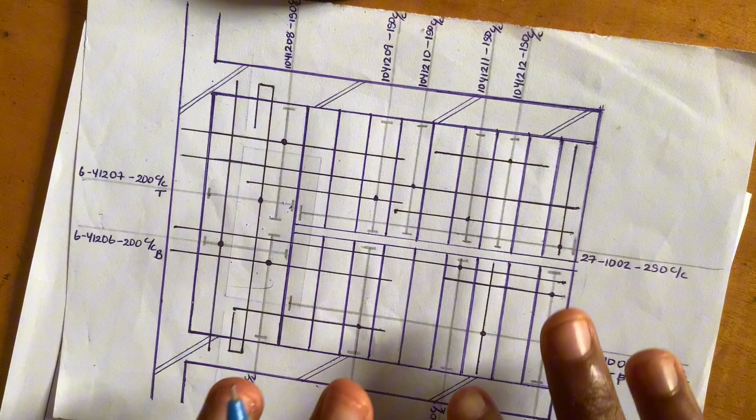In today's video we are going to be treating how to measure the reinforcements in our staircase. This is the reinforcement drawing we've been given. I know it looks absurd, but it is very easy to actually read reinforcement drawings, and I'm going to show you in this video how it is done.

This reinforcement drawing gives you an idea of the measurements of each reinforcement bar and how it is placed in the construction of the staircase. If you understand how the reinforcement bar is placed, you can easily, to some degree, calculate the total length of reinforcement needed to construct a particular staircase.

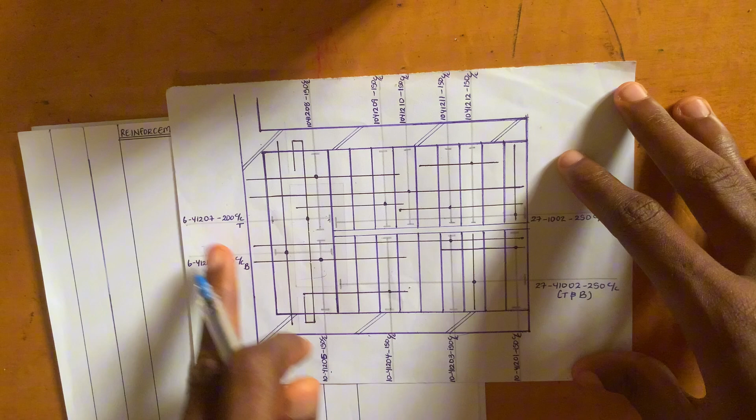So first things first, in order to read your reinforcement drawing, the first thing you should look at is what they call the call out. The call out is these markings, the details written at the side of the drawings. Most of the time you will always see a call out sidelined either vertically or horizontally on the drawing. Before we move forward, we need to understand how to read this call out, because if you don't understand it, you cannot move forward.

Let's take this call out as an example: 6 Y12 07 200 center to center, and T under, which means top. This tells us that in this drawing, when they were constructing the staircase, the reinforcements used were top reinforcements and bottom reinforcements.

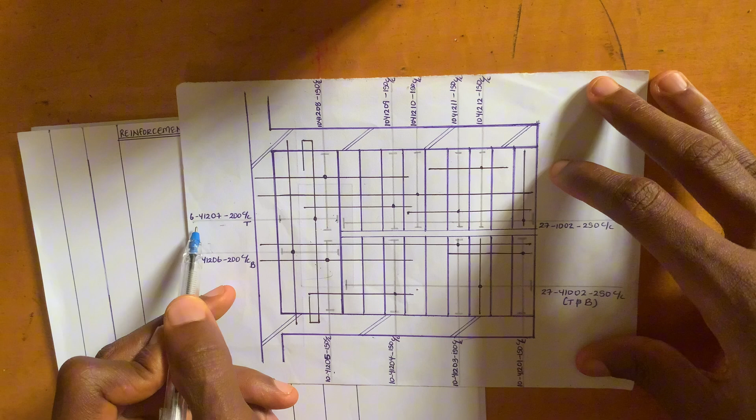So now, how do I read this call out? This 6 gives you the number of reinforcements. This Y12 gives you the thickness, or dimension, of the reinforcement, whether it is Y12, Y10, Y16, or Y20. If it was Y20, you would see it as Y20. If it was Y10, you would see it as Y10.

Then this 07 is called the bar mark. This bar mark is a way of arranging the reinforcements into numbers, so when you are making your bar bending schedule, it is easy for you - just like saying bar 1, bar 2, bar 3, bar 4, bar 5, bar 6, down to the last reinforcement you have. As you can see, this is bar 7, and underneath it is bar 6, and so on.

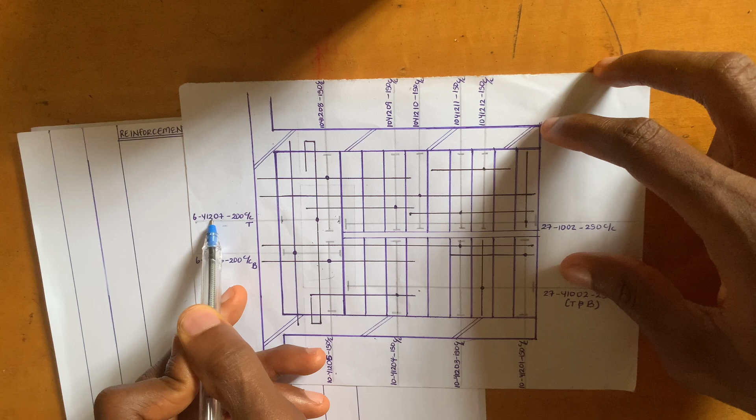So we said the first number is the number of that particular type of reinforcement. Y12 is the size of the reinforcement. 07 is the bar mark of the reinforcement. 200 C to C is the spacing at which these reinforcements will be placed. Then T under means it is the top reinforcement.

So now, since you understand the call out, how do we know which particular bar this call out is for? All you need to do is this: after the call out, you will see a line. If the call out is written vertically, the bar is placed horizontally. And if the call out is written horizontally, the bar is placed vertically.

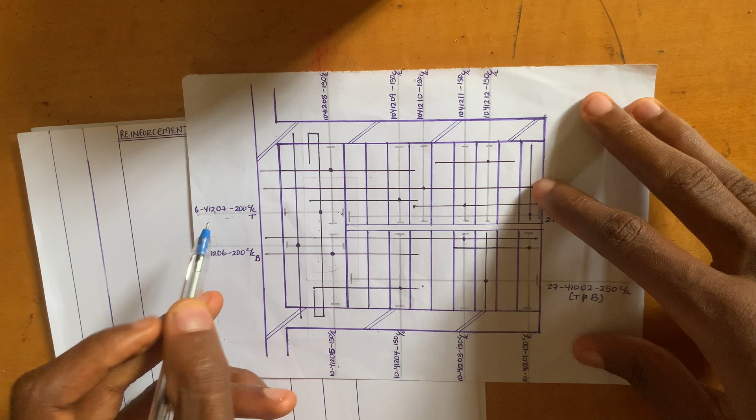This call out for bar mark 7 is written horizontally. So how do we now know where the bar is? Since you know it's written horizontally, there will be a horizontal line within this call out, as you can see drawn in pencil. All you need to do is trace this horizontal line down to where there is a dot on that particular line.

Let's go again - as you can see, we trace, and you can see the dot. So when you see the dot, you will see a perpendicular line along that dot. You trace that perpendicular line, and you can see there's a line like this. So this line that you are seeing is bar mark 7.

Let me go over it again: you trace the line for bar mark 7 to the dot, then trace the perpendicular line along that dot. So this is the dot, and you can see there's a line perpendicular to it, like this.

This line you are seeing here is the reinforcement. So we need to calculate for this length of reinforcement here.

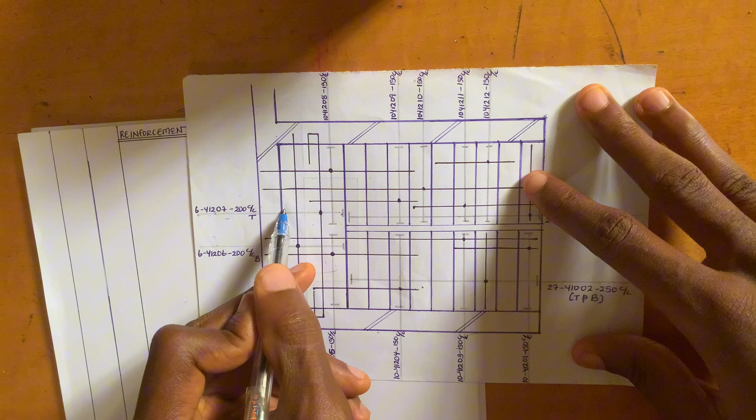After you've calculated the length of this reinforcement, how do we know how it will be placed? When tracing this line, you can see there's a dash here, and as you move, another dash here. This means the reinforcement runs along this distance from here to here, at a spacing of 200 center to center. I hope you understand the logic.

So now all we need is the size of this reinforcement for bar 7. If you determine the length of this reinforcement, all we need to do is multiply it by the number given to us, which is 6. I hope you understand the logic.

Now let's do the same thing for bar mark 6. In bar 6, they said we have 6 number of this particular bar. The thickness of the bar is Y12. The bar mark is 06, so the bar number is number 6, at 200 center to center, bottom bar.

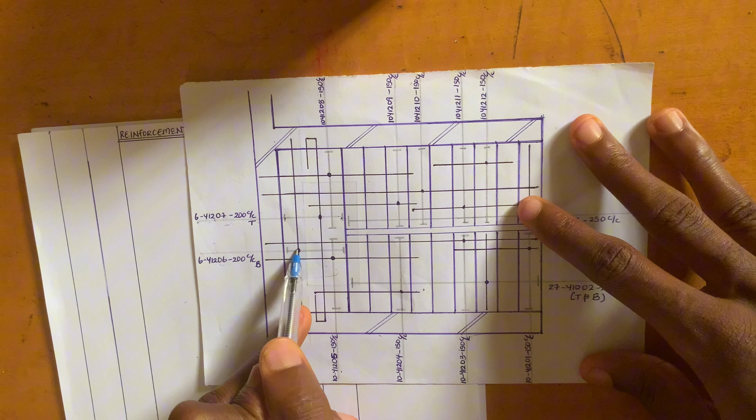You can see this is the horizontal line. You trace it to the dot. This is the dot. Are you seeing the perpendicular line there? Yes, there's a perpendicular line. You trace the perpendicular line from this dot, and you see there's a line from here to this place, a straight bar. So now all we need to do is determine the length of this straight bar, and then we record it.

After you find the length of this straight bar, you multiply it by the number given to you, which is 6.

Now in a case where you are not given the number of this particular reinforcement, how do you find it? All you need to do is find a means to derive the distance. As I said, if you trace this horizontal line, this horizontal call out, you will see the dot. Within that line, you will see the placement, how the reinforcement will be placed. You can see a dash here down to the next dash.

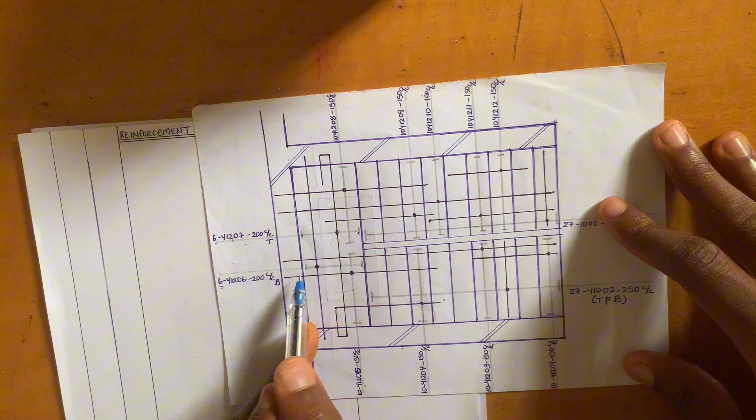If you determine the distance from this dash to this dash, then divide it by your spacing, 200 center to center, it will give you the number of reinforcements, which in this case they've given us as 6. So there's no need to start deriving all this, because they've already given it to you.

You can only do that when maybe they don't give you your call out, or they don't give you a complete call out. That is when you now start finding the number of reinforcements, which I have just told you. Let me come again.

You trace the call out to the dots. If it is horizontal, like here, trace to the dots, then trace the perpendicular line on that dot. You can see this perpendicular line here, in black pen, is the reinforcement. You can see it is a straight bar. So we need to find the measurement of this straight bar.

If we find the measurement of this straight bar, for example, if the length of the reinforcement is 8 meters, it means we're going to be having 6 number of these 8-meter bars along this distance from here to here. That is what it simply means.

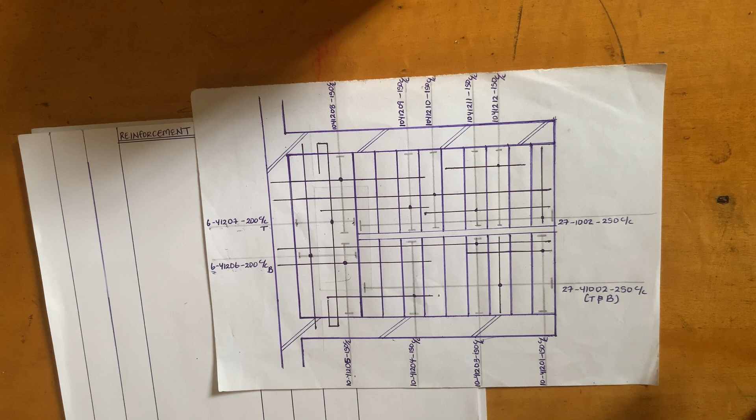Let me take one more example before we go into the calculations directly. Now, as you can see, this is a vertical call out. How do we read it? 10Y12 08 150 center to center. 10 means this particular bar is 10 in number. The thickness of the bar type is Y12. The bar mark is bar number 8. The spacing is 150 center to center.

So it is vertical. You trace the vertical line to the dot, which is this. And as I said, a vertical call out means the reinforcement is horizontal. So if this is the call out to this dot, find the perpendicular line horizontally. You can see there's a black line here, perpendicular to that call out. So all we need to do now is determine the length of this bar.

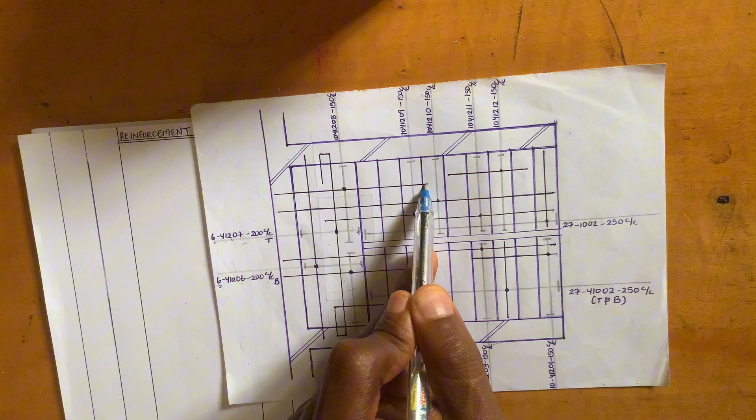Now, mind you, you are seeing this bar straight like this because it is from the plan. But the staircase is not straight like this. The staircase is straight on the landing, and then it is slanting on the steps side, because this particular reinforcement will be inside the waist, just like we have here.

So you can see this reinforcement here. This reinforcement was first straight on the landing, and then it bent down. So that is why these are the things you have to keep in mind. This bar that you are seeing here is not a straight bar - it is at first straight on the landing, then it is bent on the waist.

Please, I hope you get the logic. So this part here, this box you are seeing like this, is your landing. Then these are your steps.

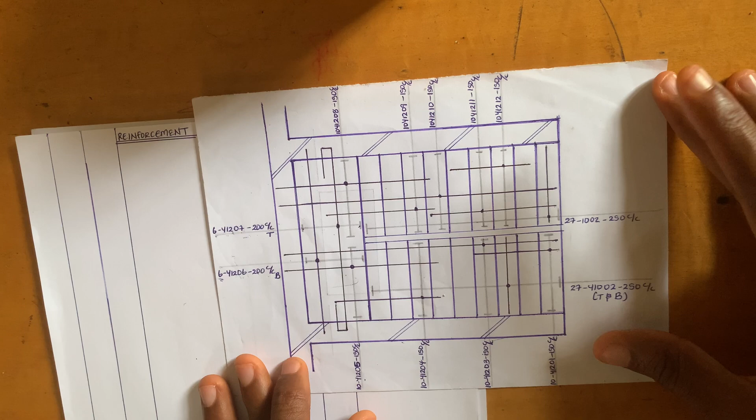I know it may seem confusing at first, but by practice, you will begin to understand how easy calculating for the reinforcement of drawings actually is, especially when they give you the reinforcement drawing and the call out. So going further with this little piece of information I've given, we are going to be making a bar bending schedule with it so that you can easily understand what we're going to be doing.

So to make the bar bending schedule, first you have to go through your call outs and check the types of reinforcement bars used in the construction of the staircase. As you can see from what we have here, there are 2 types of reinforcements used for this construction: Y10 and Y12. So we can start.

This is call out 1. Call out 01. You can see it's Y12, Y12, Y12, Y12. Here, Y12, Y12. Here, Y12. Here, Y12. Here, Y12, Y12, Y12. Then here is Y10.

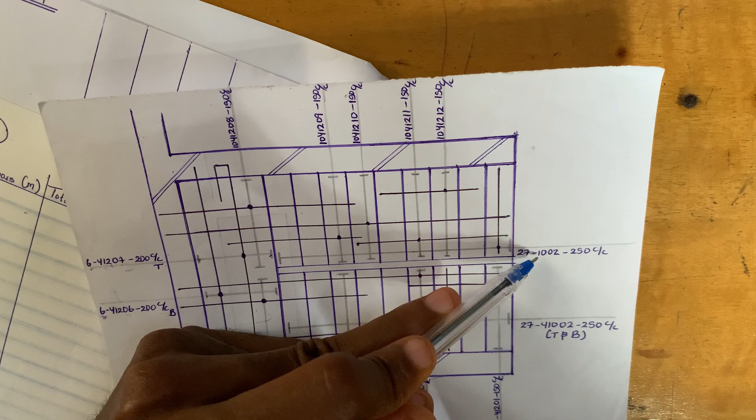Here Y10. So for the bar bending schedule, we are going to be making a table for each kind of the reinforcement bar. This table will consist of the bar mark, the number of bars, the length of the bar in meters, and the total length of the bar.

Now this total length of the bar is calculated by multiplying the length of the bar by the number of that particular bar in the structure. So for example, if the length of the bar we calculated is 5 meters and we are having 10 number of that 5 meter bar in the structure, you multiply that 5 meter by the 10 number and it will give you 50. So the total length of that particular bar will be 50.

So the same table you have done for Y12, you'll be doing the same table for Y10. The table consists of the bar mark, the number of bars, the length of the bar, and the total length of the bar, all in meters.

To move further, we are now going to determine which of the bar mark is having Y12. So let's start with bar mark 1. So we can see this is bar mark 1, it has Y12. So we'll write bar mark 1.

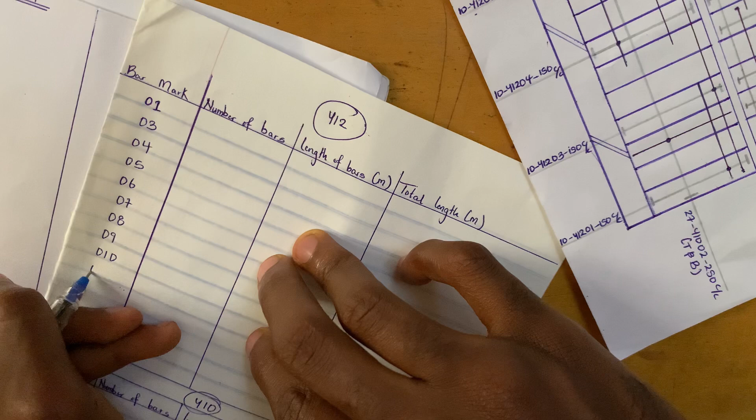Okay, so let's just make things faster. Only bar mark 2 was made out of Y10, 10 mm reinforcement bar. So we can just say from bar mark 1 to bar mark 12: bar mark 3, bar mark 4, bar mark 5, bar mark 6, bar mark 7, bar mark 8, bar mark 9, bar mark 10, 11, and 12. Therefore, Y10 would only be bar mark 2. Hope you get the logic.

Now, where the main work now begins is determining the length of each bar, which we're going to be doing now. So the first bar is bar mark 1. That's bar 1.

Now, if you look at your drawing, you will go to your drawing and then locate bar mark 1 in your callout. So in our callout, this is bar mark 1 here. Like I said before, you read the callout. So this particular bar is 10 in number, as you have here.

Let me make it like this so that it can be easily read. So 10 Y12, bar mark 01, 150 center to center. So this particular bar would be 10 in number. It is Y12 and it is bar mark 1. So you trace this callout now.

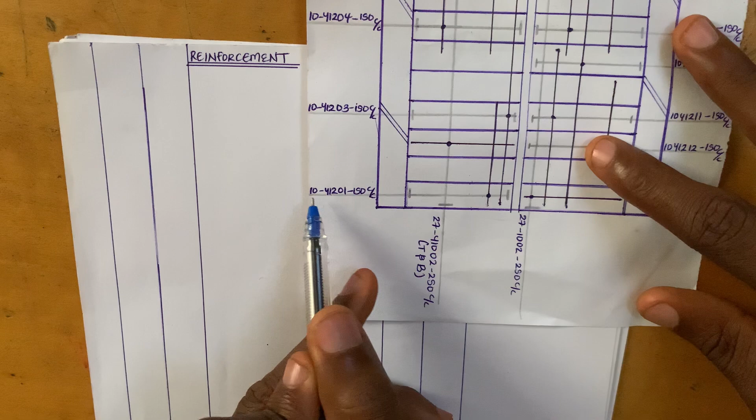Since we've changed the orientation of the paper, this callout now is horizontal. So we'll trace horizontal to the dots, then trace the perpendicular line that you are seeing on that dot, which is this.

So now this is the bar, and you can see that this bar is along the sloping side of the staircase, meaning that this bar is sloping. You are seeing it straight like this because of the orientation of the drawing from the plan, but on the section it is going to be slant. So now, how do we find the length of this bar?

We can find the length of this bar using Pythagoras theorem. Now, this bar is slanting, right? So now all we need to do is determine the opposite and the adjacent of this bar, making this bar the hypotenuse.

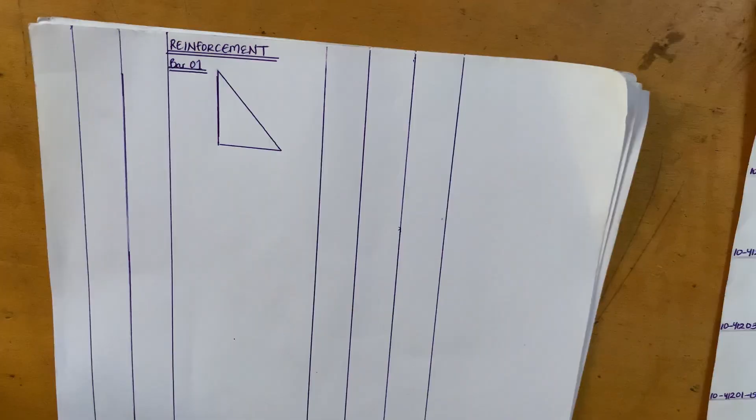So if you section this bar here, this is our bar 1. If you section it, you are going to be having a slanting bar like this. So in order for us to know the length of this slanting bar, I brought out the slanting bar and converted it into a right angle triangle. If we know our x, that's the opposite and the adjacent, then using Pythagoras theorem we can find the length of the bar. So how do we find the opposite and how do we find the adjacent?

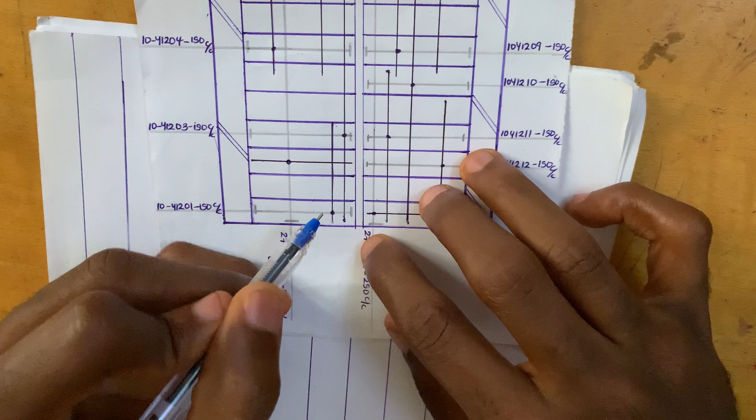Now the adjacent, which is this part of the bar, you can find using the tread of the staircase. So now you know that from here to here is our tread, meaning this bar, as you can see here in the drawing, is within 1, 2, 3, 4 treads.

Let me come again. This bar you are seeing here in the diagram is within 4 treads, 1, 2, 3, 4. And we know that the dimension of our tread is 333 mm.

So in order to find this adjacent length, you multiply 333, which is the length for one tread, by 4. Doing that, 333 times 4 will give 1332. It means that the adjacent from this end of the tread to this end of the tread is 1332.

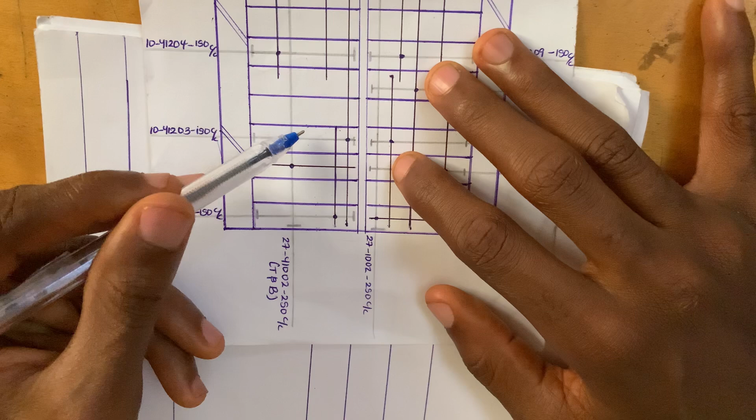But mind you, we are going to be deducting concrete cover from the two sides. So since we know that the length from here to here is 1332, we are going to minus 25 from both sides, because the reinforcement is not going to be showing at the edge of the step. It is going to be inside. So we are going to be assuming that we are removing concrete cover from both sides. So this is what I mean.

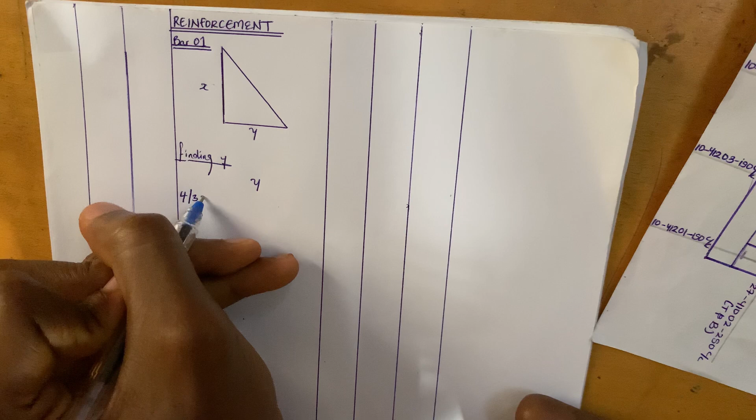In order to find y, which is this, we know that this reinforcement is within 4 treads. So we know that the length of our tread is 333. So finding y will now be 4 by 333, and that will give 1332. So we'll now less concrete cover.

Concrete cover, which is 2 by 25. We're assuming that the concrete cover is 25 mm. So that will give 50. So if I less this now, that will give me 1282. So this is our value for y.

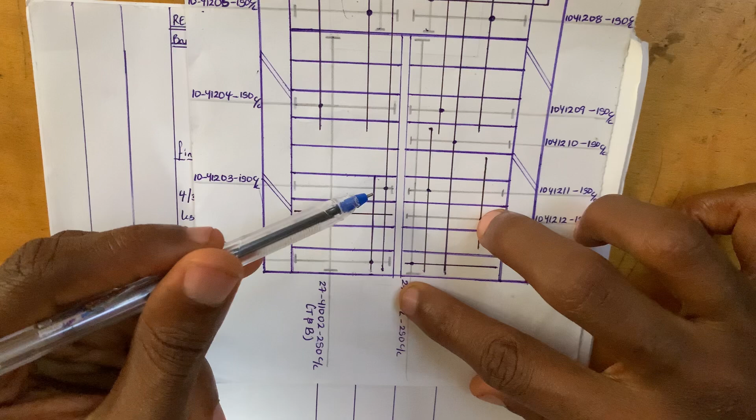Now we have to find our x. So x, you can see, is vertical, meaning that the orientation for the opposite would be the riser. So like I said, this bar is within 4 treads, meaning that the elevation of this bar will be within 4 risers.

So we know that the dimension of our riser is 175 mm. So to find x, we will now state that 4 times 175, and that will give me 700.

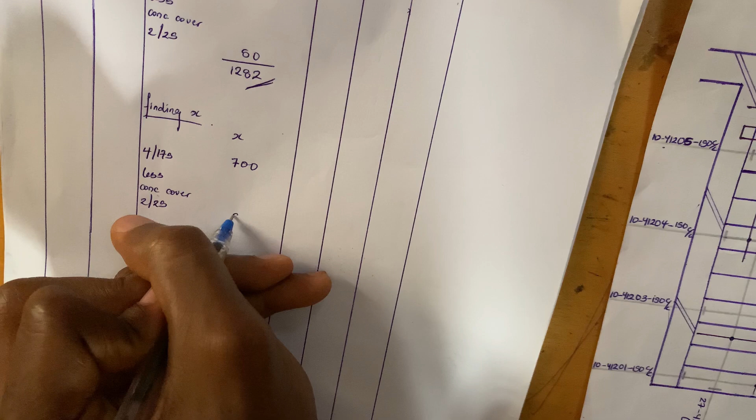So we will now less concrete cover, which is 2 by 25, and that will give 50. And doing this, it will get 650. So it means that x is 650, and y is 1282.

Now doing this, we can now find what our hypotenuse is using Pythagoras theorem. So we can now write, using Pythagoras theorem, hypotenuse square is equal to the sum of the square of the two other sides.

That is 0.65 square plus 1.282 square. I converted it to meters. Then all square root. This one cancel this one. So here it will now be equal to 0.4225 plus 1.282, plus, 1.6435, all square root.

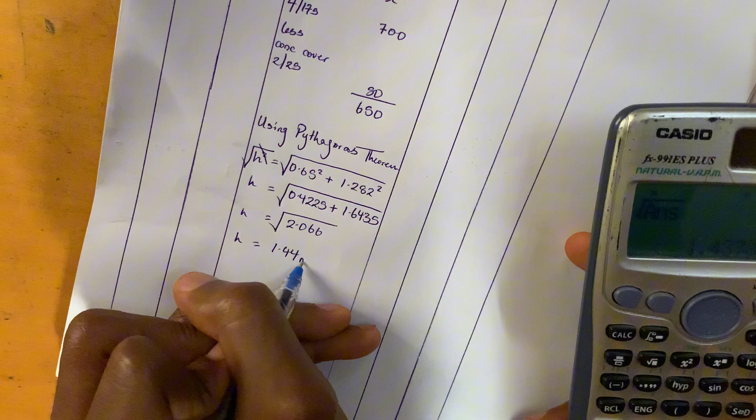Which will now be equal to 0.4225 plus 1.6435, 2.066. This will now be equal to square root of this, equals 1.44 meters. So it means that the length for bar 1 is 1.44 meters.

Now that you've gotten this, you now go to your bar bending schedule. So the length of bar 1, as you can see here, we've calculated it as 1.44. So you write 1.44. And in the bar, in the call out, what is the number of this particular bar? This is bar mark 1.

You can see they've given us 10 in number. So the number of bars will be 10.

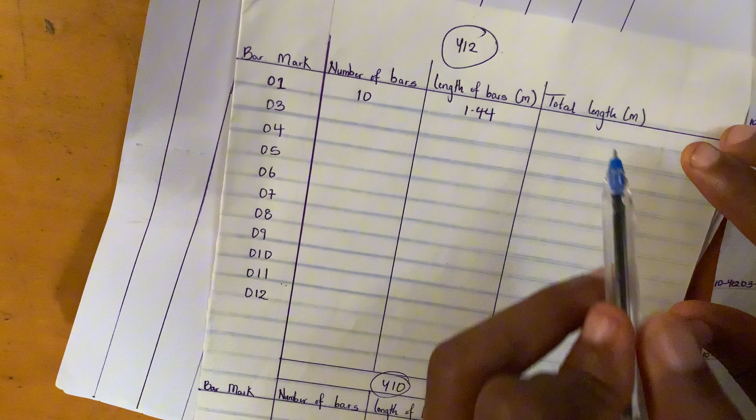So the total length of bar mark 1 will be what? 1.44 multiplied by 10. And that will give us what? 14.4.

So the next bar we're going to be calculating for is bar mark 2. Now for bar mark 2, as you can see, the size of the bar is Y10.

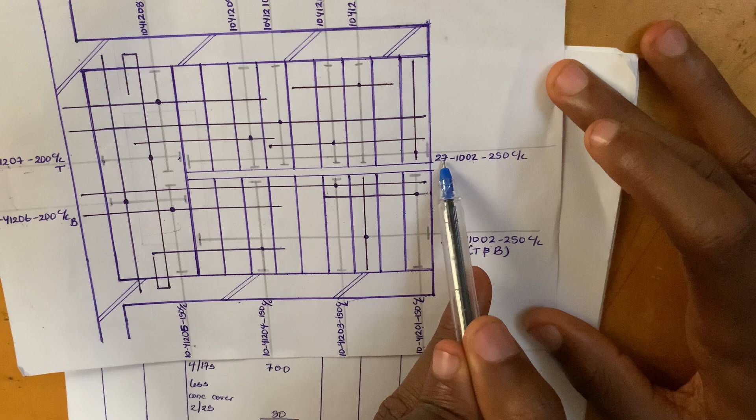We're going to be having 27 number of this particular bar on the rising flights, on the first flight and on the second flight. You can see this bar mark 2, also this bar mark 2. So 27 number for the first flight, 27 number on the second flight. That will give us a total of how many? That will give us a total of 54 number of bar mark 2.

So now, if you look at this drawing, we know that the call out is horizontal on the paper orientation like this. So now the call out is horizontal: 27 Y10 bar mark 2, 250 center to center. The top, it is both top and bottom bar, and the total is 27 in number. So now you trace the call out to the dot.

This is the dot. Trace the perpendicular line on that dot, which is this. So this line is the reinforcement. So this reinforcement is a straight bar, which makes it easy to calculate. So now that we know this as the reinforcement bar, how do we now determine the length of this reinforcement bar? It is very easy.

All you need to do is this. Since you know that this reinforcement bar is sitting within the width of the stairs, all you need to do now is to less concrete cover from both sides, and it will give you the length of this reinforcement bar. So in our drawing, you can see that the plan states that the width of the stair is what?

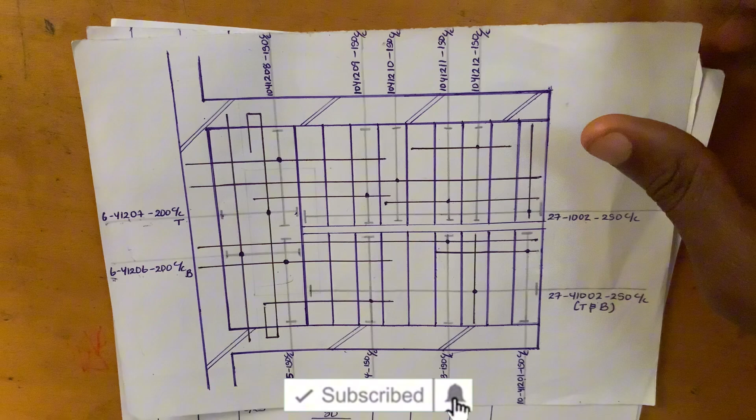1,200. So since we know that the length of the width of the stair is 1,200, we can calculate it by saying: if width of stair is equal to 1200, then we'll now less concrete cover, 2 by 25, and that will give me 50. And then we close. So 1200 minus 50 will give me 1150 mm.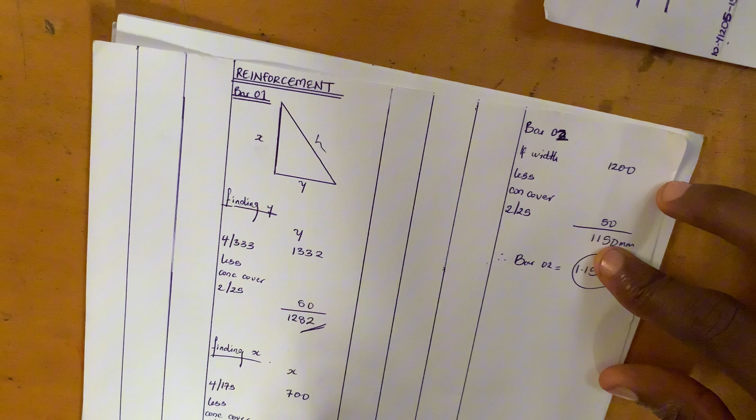So the length of this particular bar mark 2 will now be equal to 1.15 meters. I hope you get the logic. This one was straight to the point because it was a straight bar. If the bar was slanting, then we'll now have to start using Pythagoras theorem. I hope you understand the logic. So you now go to your bar bending schedule.

Now for bar mark 2, we are using Y10. So you go to the table for Y10, which is this. We know that the length we've calculated is 1.15. So we write the length of the bar is 1.15.

So it means that if the length of bar mark 2, which is this, is 1.15, it means that this same bar on the second flight, which is this, would be the same thing. Don't forget I told you that we're having this same type of bar on the first flight and on the second flight. Now look at where they place this call out. Now if you trace it to the dot, this is the reinforcement. But on this place here, that's on the second flight, if you trace it, this is the dot, but it is the same reinforcement.

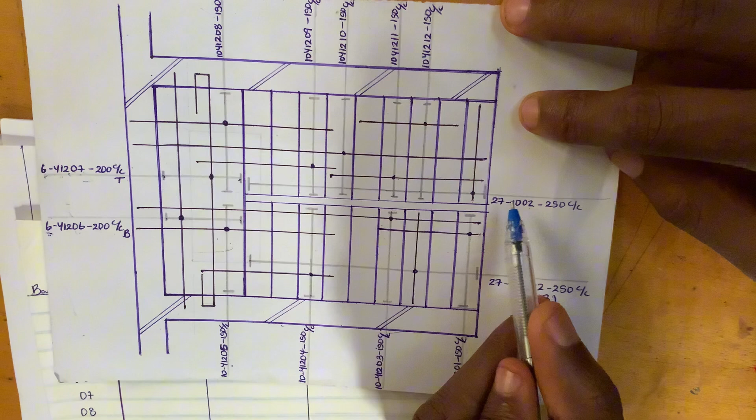So instead of calculating this one again, this reinforcement that we've calculated for can serve for this reinforcement. They are the same thing. So now, if you add 27 plus 27, it will give us 54 in number. So it means that for bar mark 2, the length of the bar we've calculated is 1.15 meter, and the number of bars will be 54.

So what will be the total length? It will be 1.15 times 54, and that will give me 62.1. Doing this, we've measured for bar mark 2. The next one we're going to be measuring for is bar mark 3.

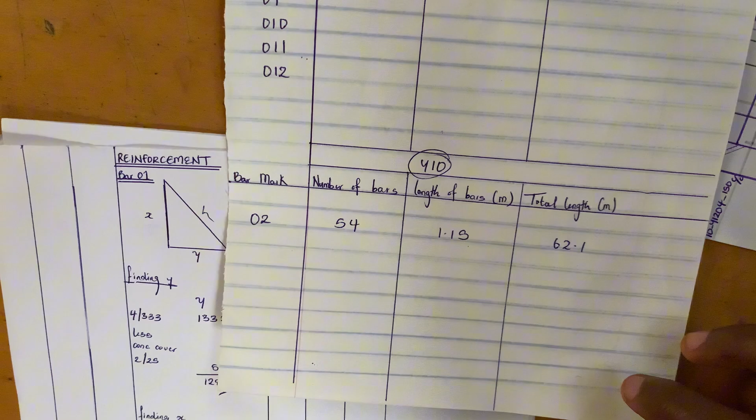So you go to your drawing and locate bar mark 3. This is bar mark 1, this is bar mark 2, and as you can see here is bar mark 3. Based on the orientation of the paper, my paper is in landscape, so it means that this call out now is vertical, written vertically. So we can see 10 Y12 bar mark 3, 150 center to center. So now it means that this particular bar is 10 in number, and it is Y12. So you trace the reinforcement to the dots, and then trace the perpendicular line on that dot.

So as you can see, this bar is from here to this end.

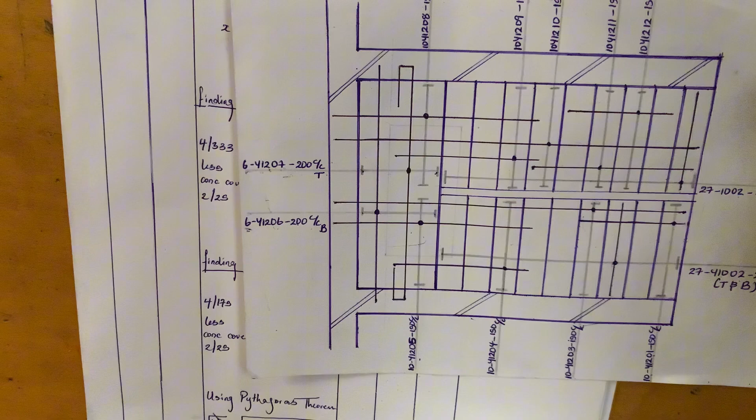Now on the plan, it is looking straight, but the only part of the staircase that is straight is the landing. So it means that this bar is both a straight bar and a slanting bar. The orientation of this bar will be like this: a straight bar on the landing, and then slanting on the waist, on the sloping side.

So first, we are going to be calculating for this part. Let's name it X. Then before we calculate for the slanting side, Y.

So to calculate for the straight side X, we know that the landing is entering into the wall, like I said in my previous video when we were measuring for the concrete work.

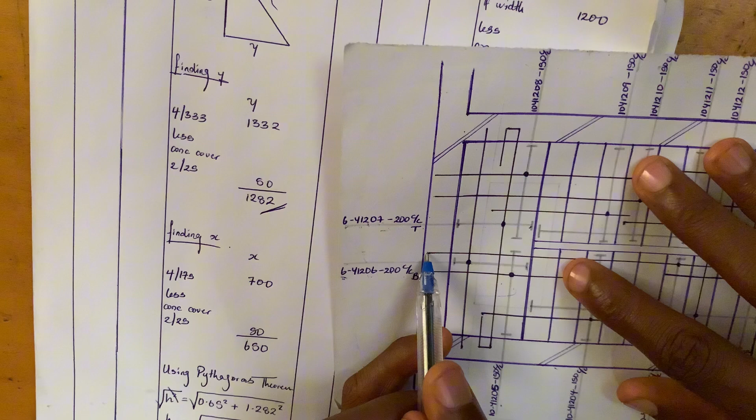So since the concrete is entering into the wall, the reinforcement also will be entering into the wall too. So all you need to do is find the width of your landing, which is from here to here. Our drawing says the width of our landing is 1,200. That's the width from here to here.

So we're now going to be adding the wall thickness, which is 225. So let's calculate.

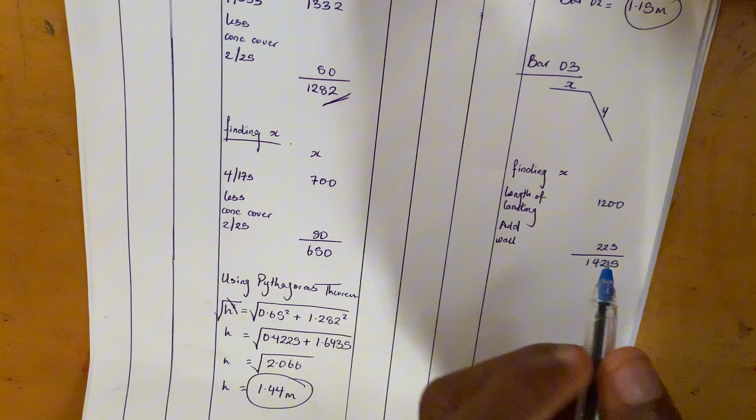Finding X. Length of landing is 1,200. So we're going to be adding wall, which is 225, and that will give me 1,425. So since we've gotten this as 1,425, it means that from this edge of the landing to this edge of the wall will be giving us 1,425. So it means that from here to here is 1,425.

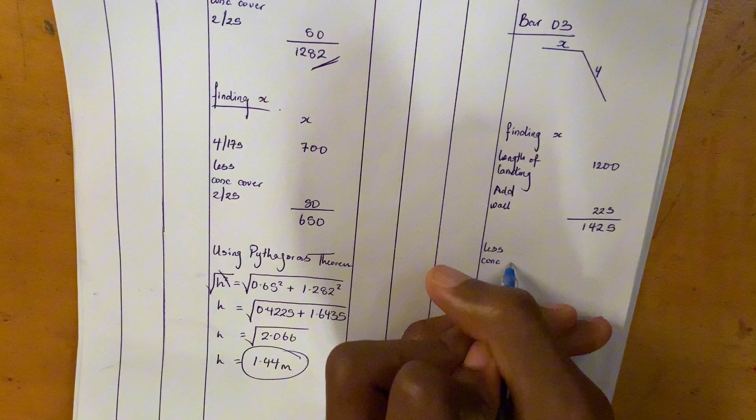Then we're going to be minusing concrete cover from both sides. Since our concrete cover is 25, we'll say less concrete cover is 2 by 25, and that will give me 50. So when you do the calculation, 1,425 minus 50 will now be equal to 1,375.

So X will now be equal to this. Then we have to find for Y.

So as you can see, our Y is a slanting bar. So how can we find for this slanting bar? We can now use Pythagoras Theorem. So first, you will bring out the slanting bar. If this is the slanting bar, then you convert it to a right angle triangle.

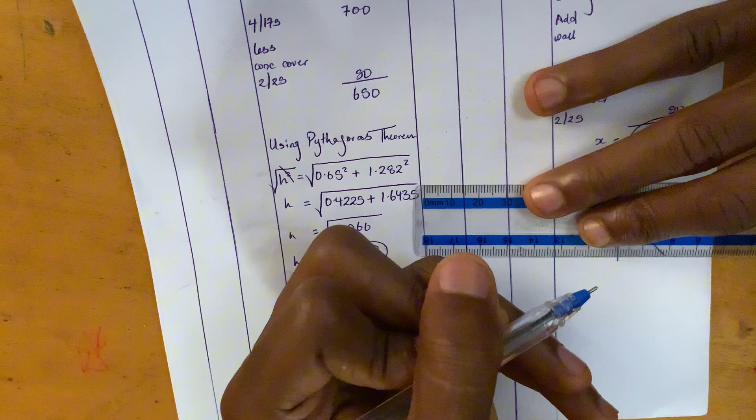So now, if the slanting bar is Y, we have to find for A and B, where A is the opposite side and B is the adjacent side. So now, you go to your drawing.

This is bar mark 3, right? If this is bar mark 3, you locate the dots. So this is the reinforcement here. We've already calculated for the straight side.

So now the slanting side is throughout the step. We're going to be seeing this slanting bar from step 1 down to the last step. So to find for the adjacent side, we're going to be using our tread. So how many steps do we have?

We have 1, 2, 3, 4, 5, 6, 7, 8, 9. 9 steps. So since we know that the length of our tread is 333, we're going to be multiplying 333 by 9 steps, and that will give us 2,997.

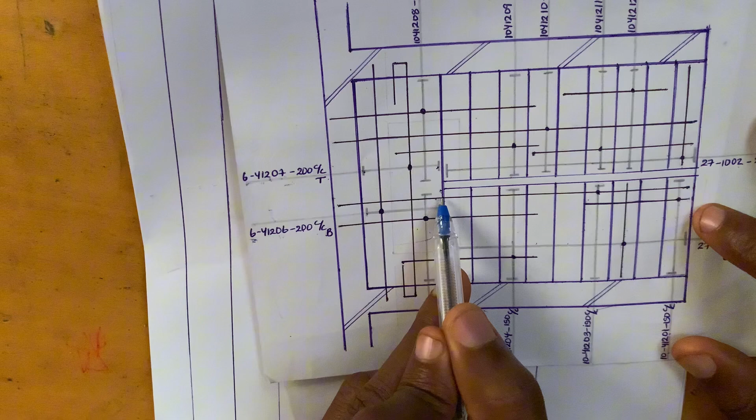Now, if you notice, we minus concrete cover for the straight side. Now, this concrete cover, we're going to be adding it to the sloping side so that it can form a link, because this bar you are seeing here are not two different bars. It is one bar bent into that shape. So this concrete cover we minus here, we are going to be adding it towards the slanting side so that it can be like a link.

So now, since after adding concrete cover to this side, we are now going to be minusing concrete cover from this side, because the reinforcement here is supposed to be inside the concrete. I hope I'm making sense. So we're now going to be adding concrete cover to this edge. We will now say finding B.

To find B, we will say the length of our tread is 333 multiplied by 9, and that will give us 2,997.

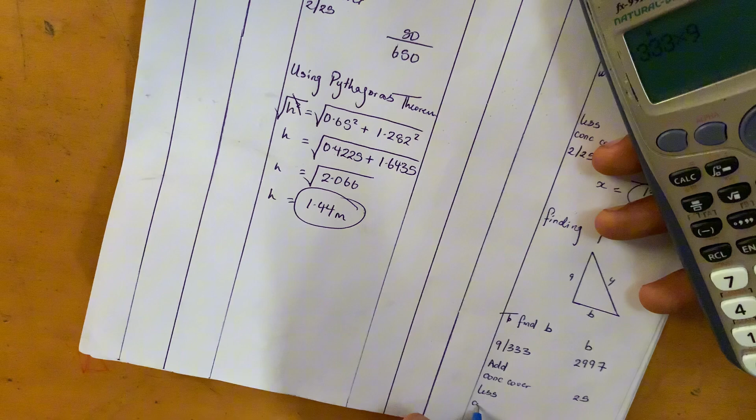Now that we have that, we will add concrete cover, which is 25. After adding concrete cover, you will now less the concrete cover for this other side, since we added it to form the link, then we'll be minusing it here. It's just like plus and minus. So less concrete cover 25, and that will still give us 2,997.

So it means that the adjacent side, which is B, will be 2,997. Now that we've gotten our adjacent side, we need to find the opposite side, which is A.

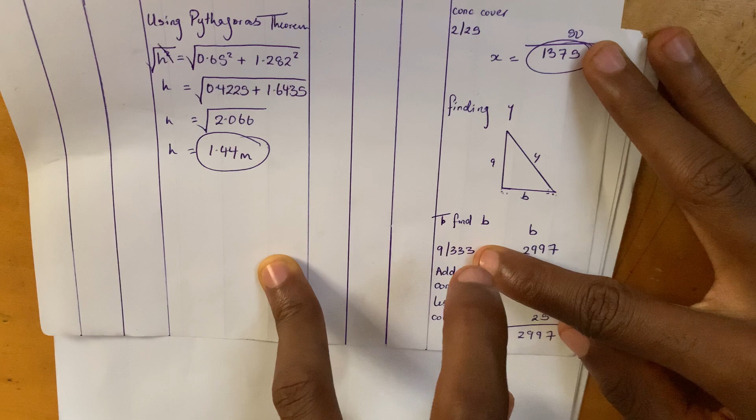To find A, since we said B is lying on 9 treads, we are going to be finding A using the same number of risers. Since we have 9 treads here, this particular bend bar, the elevation will be on 9 risers. The length of our riser is 175. So A will be equal to 9 times 175, and that will give us 1,575.

We will now still do the same thing we did concerning the concrete cover, because if you look at the elevation, there will not be concrete cover here, but there will be concrete cover here, and this place there will be no concrete cover. So just do the plus and minus. If you add concrete cover here and minus the same concrete cover here, it will give you 0. So 25 minus 25 is 0. It means A is going to be 1,575.

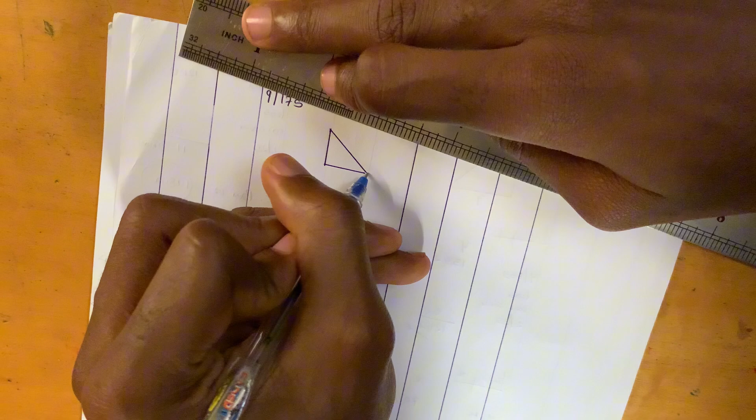Let me just draw the triangle here. So A is 1,575, and we calculated B as 2,997. So we need to find what the hypotenuse is.

So the hypotenuse squared is equal to 1.575 squared plus 2.997 squared, all square rooted. That gives me 3.39 meters. So we'll now have to find the summation of the straight bar and the bent bar.

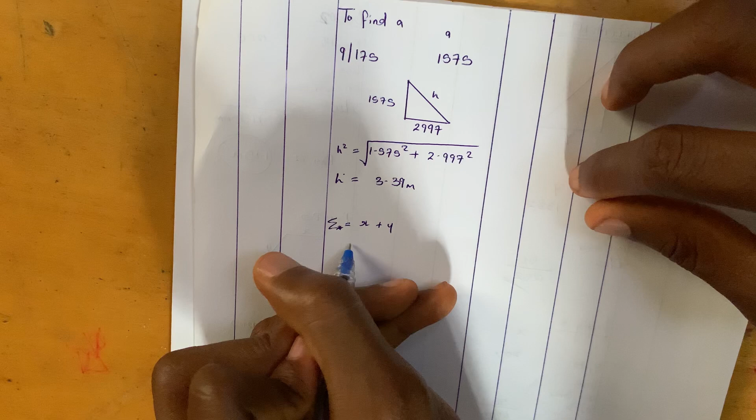We calculated our x, which is this, as 1375. We'll now find the sum of x plus y to give us the total length of the bar. So x is 1375.

1375, just put it in meters, then plus y, which is this, would be 3.39. So you add the two together: 1.375 plus 3.39, and that gives me 4.765, approximately 4.77 meters.

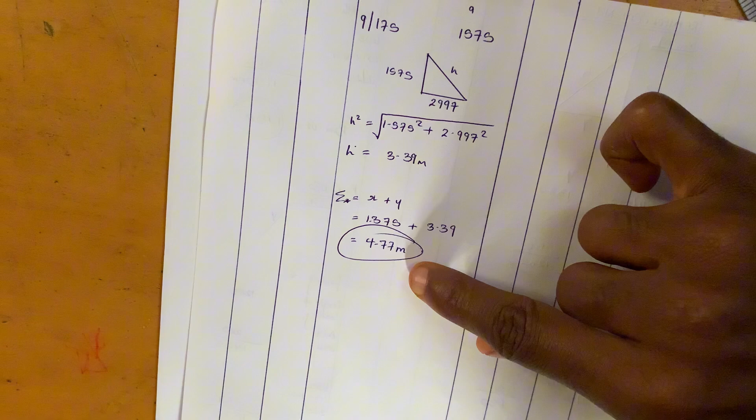Since you've gotten the total length of bar mark 3 as 4.77 meters, now you go to your bar bending schedule and record it. So the length of bar mark 3 is 4.77, and what's the number of that particular bar?

We can see that bar mark 3 is 10 in number. So it means we're going to be having 10 of this particular bar within this distance from here to here. So this reinforcement will be lined like this, 1, 2, 3, 4, 5, 6 until it reaches 10. That's why you can see the arrow from here to here.

Record bar mark 3, 10 in number. So 4.77 multiplied by 10 will now give you the total length, which is 47.7. Now we'll go towards bar mark 4.

Now you go to your drawing and locate where bar mark 4 is, and this is bar mark 4. You trace it to the dots, this is the dots, then the perpendicular line on that dot. So this is the reinforcement. Now what can we say about this reinforcement?

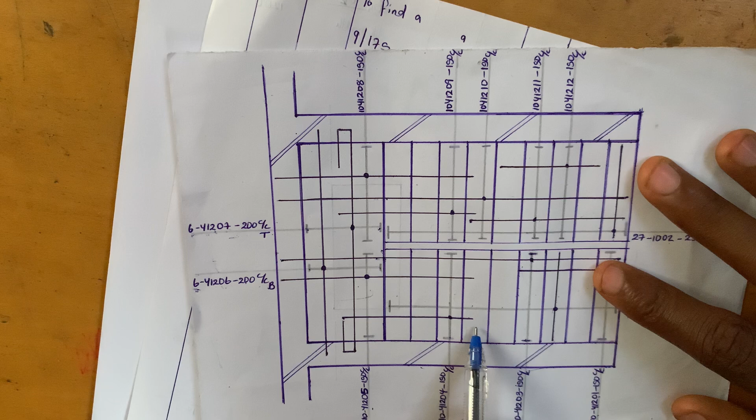You can see that this reinforcement is within both the landing, which is the straight side, and the step, which is the slanting side. In the same manner that we calculated bar mark 3, we are also going to be calculating bar mark 4, meaning that this is how bar mark 4 looks like. Bar mark 4 also looks like this, it's just that it will be smaller than bar mark 3.

So now, how do we go about calculating this? We can start by looking at the landing side. This landing side does not go to the end of the landing. I will say, based off assumption, it was just half, it entered just half of the landing. Since we've calculated the total length of our landing, from this edge down into the wall, as 1425, if we divide it by 2, it can give us the length from here to here. Then we minus our concrete cover for one side.

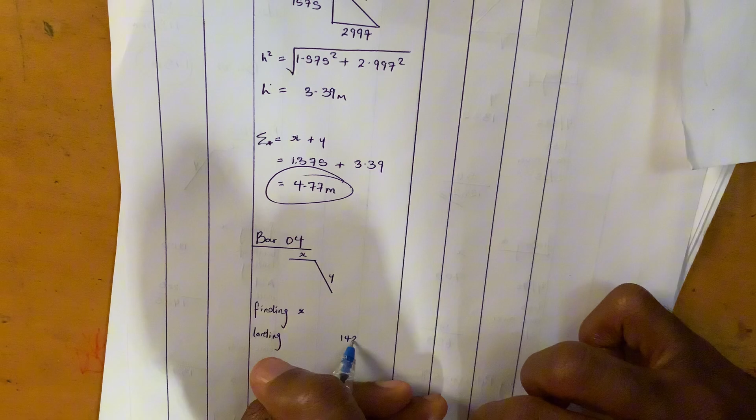So let's do that. This now will become x, and this will become y. So we're finding x. The length of the landing is 1425. So 1425 divided by 2 is equal to 712.5. So you will now less concrete cover for this side, which is 25. So less concrete cover.

That will give me 687.5. So this is what x is.

Now you have to find for y. As you can see, this is bar mark 4, so this is the reinforcement here. So we need to calculate the measurement of the reinforcement from here to this end, and the slanting bar is within how many steps? 1, 2, 3, 4. As you can see, this bar is not completely covering the fourth one, so it is half of the fourth one, so we'll just say 3.5. So 1, 2, 3, and then half of the fourth step.

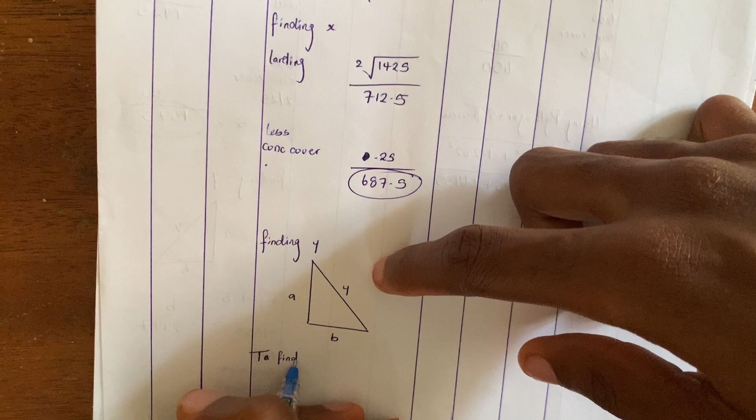So in order to find our adjacent side, we will now be multiplying the size of one step, which is 333, by 3.5. So to find B, we'll write 333 by 3.5, and that will give me 1165.5.

So we will now add concrete cover for one side, which is the concrete cover for here that we minus from the straight bar, we have to add it here. So that's add concrete cover, which is 25, and that will give me 1190.5. So this is B.

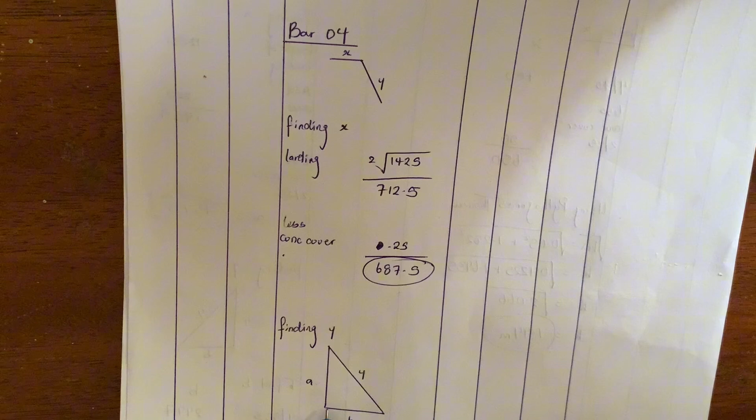Now we need to find for A. To find A, we know that the reinforcement here is within 3.5 treads, meaning that this slanting reinforcement will have an elevation as high as 3.5 risers. So we know that our riser is 175 in measurement, so we'll multiply it 3.5 times 175, and that will give me 612.5.

So we will now add concrete cover, and that will give me 637.5. So since we found our A and we found our B, we can now find Y using Pythagoras theorem.

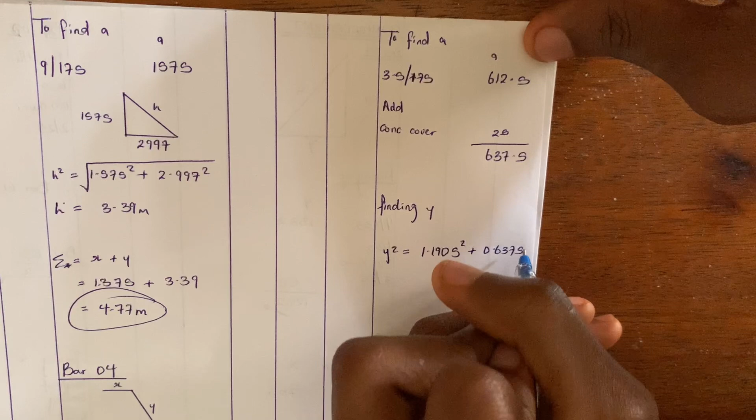So finding Y will now be Y squared is equal to 1.1905 squared plus 0.6375 squared, all square root. That will now be equal to 1.35 meters. So we now have to find for the summation of X and Y.

So the summation will now be equal to X plus Y, and we found X as 687.5, that's 0.688, plus 1.35, and that will give us 2.04 meters.

So this is the length of our bar 4. So you go to your bar bending schedule and you book it, the length is 2.04. Then how many of this bar 4 do we have? You go to your reinforcement drawing and you check. This is the call out, and it says they're 10 in number, so number of bars is equal to 10. So 2.04 multiplied by 10 is equal to 20.4.

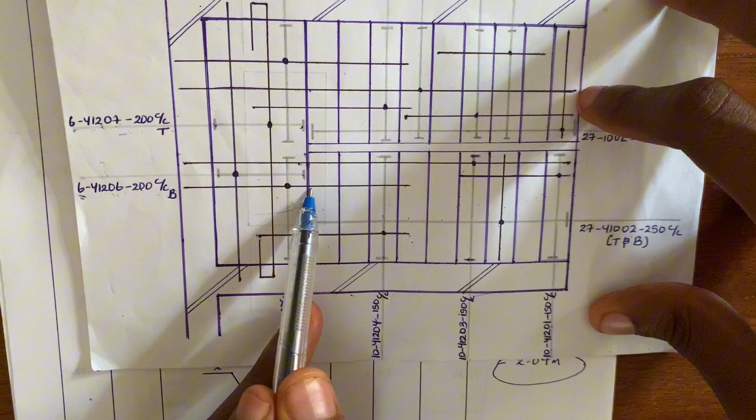So all we need to do now is to calculate for this length here. After we calculate for this length, we now add this to the known that we have here, and it will give us the total length for this particular bar. So bar 5 is a combination of a straight bar and a slanting bar. We already know that y is the same as bar 4, and we calculated y in bar 4 as 1.35 meters. So now we need to look for x.

So in order to look for x now, what can we see? We know that the length from here to the end here, we've calculated this as 1,425. How did we do that? Remember, the length of our landing was 1,200, so we added 225, because the landing enters into this wall. So from here to here is 1,425.

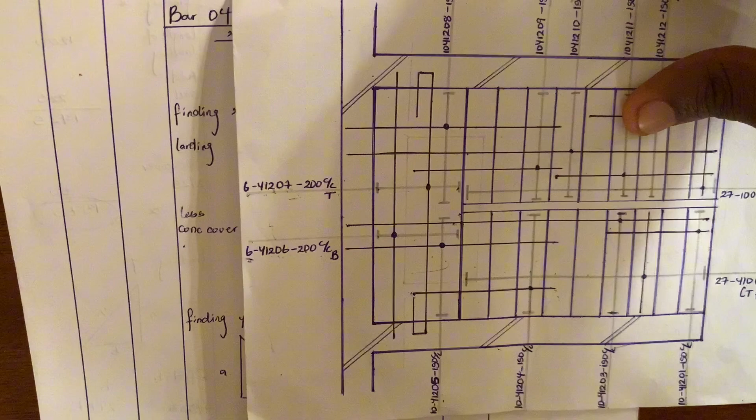So what we're going to be doing now is we're going to be minusing concrete cover from both sides. So finding x, we will now say 1,425, which is the length of our landing. We will now less concrete cover, which is 2 by 25, and that will give us 50. So 1,425 minus 50 will give me 1,375.

So since we know that x is 1,375 and y is 1.35 meters, we can now find the sum. It will now be equal to 1.35 plus 1.375, and that will give us 2.73.

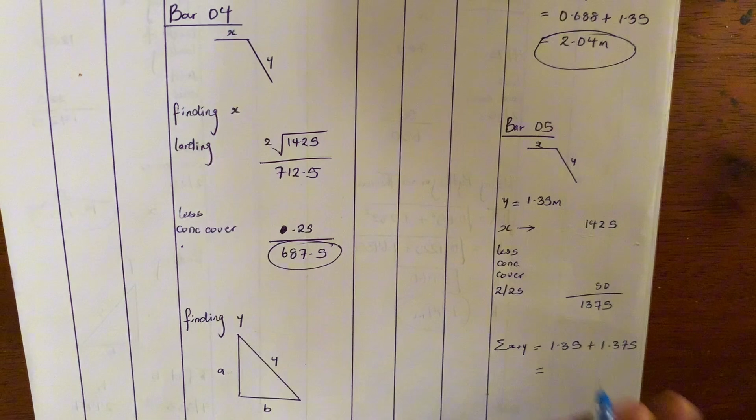So this is what? The total length of bar 5. Then we book. So we locate bar 5. The length is what? 2.73 meters.

Then you check how many of these reinforcements we have. You see, the bar mark says there are 10 number of 2.73 lengths of this particular bar. So we'll now measure 10. So to find the total length, we'll now see 2.73 multiplied by 10, and

that will give us what? 27.3. Then we move to bar 6. So we are going to be measuring for bar 6, and bar 6, as you can see in the drawing, this is bar 6.

You trace the distance to the dot, and you can see this is a straight vertical bar. So it's easy for us to measure. All you need to do now is to find the in-to-in length of your landing.

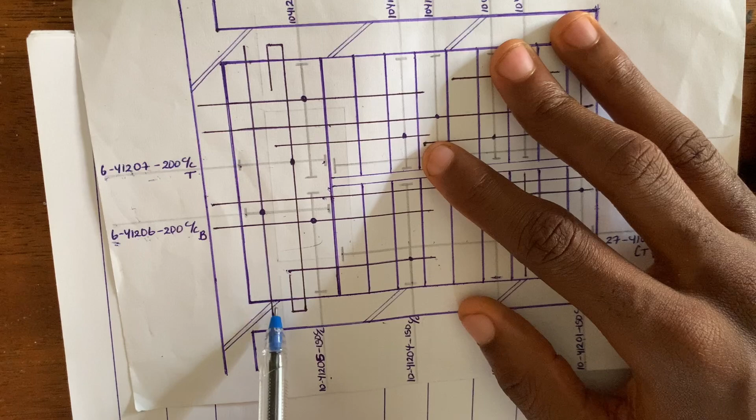When you find the in-to-in length of your landing, don't forget that the landing, the concrete, enters into the wall to some extent. So you will now be adding, if the landing enters by 25 mm, you'll be adding 25 to both sides, right? You'll be adding 25 to both sides.

So in our drawing, here, they said that the width of the landing, that's from here to here, is 2,500. So we're going to be adding an extra 25 for the part of the landing that enters into the wall.

So to book, we know that the width of our landing is 2,500, right? So we are going to be adding 25, that's the projection, to both sides. That's 2 by 25, or let's just say 2 by 30. That's what we used in the concrete. So that will give us what? 60.

So that will be 2,500 and 60. That's the total length of the landing. So we'll now deduct concrete cover from both sides, which is 2 by 25, and that will give us 50, and that will be 2,500 and 10. So the total length of this particular bar is this.

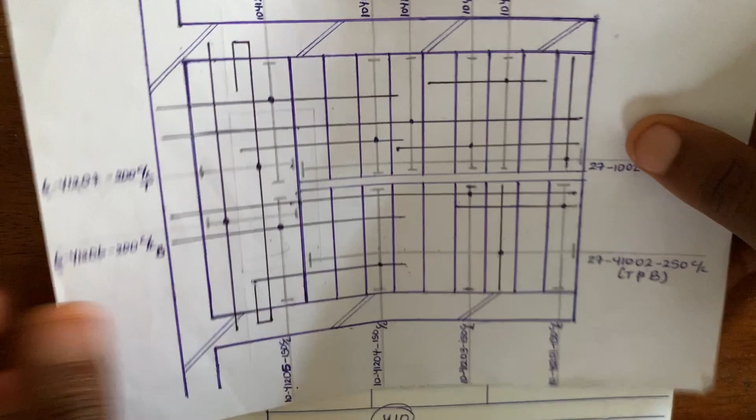Since this is bar 6, they say that we have 6 in number. So you now write 6. To find the total length now, we'll say 2.51 multiplied by 6. And that will give me 15.06.

So doing this, we've booked for bar 6. Now we're going to measure it for bar 7. And this is what bar 7 looks like in the drawing. So this is our bar 7. We trace it to the dot.

Now if you look at this bar 7, it has a certain weird shape like this, but it is very easy to measure. So if you section this particular bar, this is what you'll be having in real life. In real practice, this is what the bar looks like. So it's a straight bar.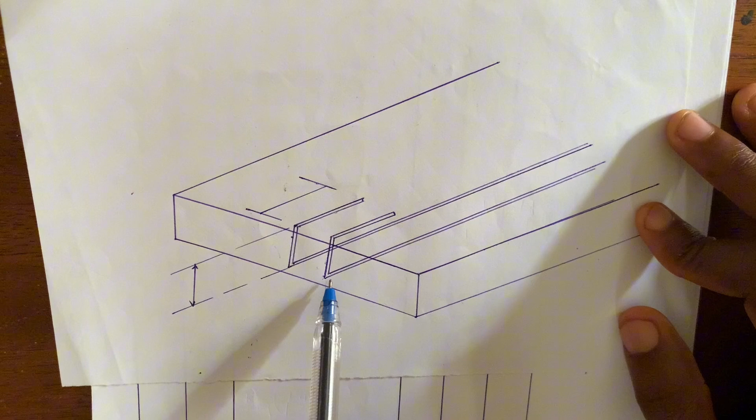Then this bar you are seeing like this is a bar that spans the thickness of the slab, minus concrete cover from both sides. Then this bar you have here is what they call a return bar, and this return bar is calculated using a formula, and that formula is what?

50D, where D is the thickness of the reinforcement. So if this reinforcement is 12 mm, it will be 50 times 12. Whatever you have will be the length of this return you have here.

So all you need to do now is determine the length of this bar, determine what the length of this bar will be. To calculate the length of this bar that is looking vertically, all you need to do is get the thickness of the slab and less concrete cover from both sides, and that will give you the length for this bar.

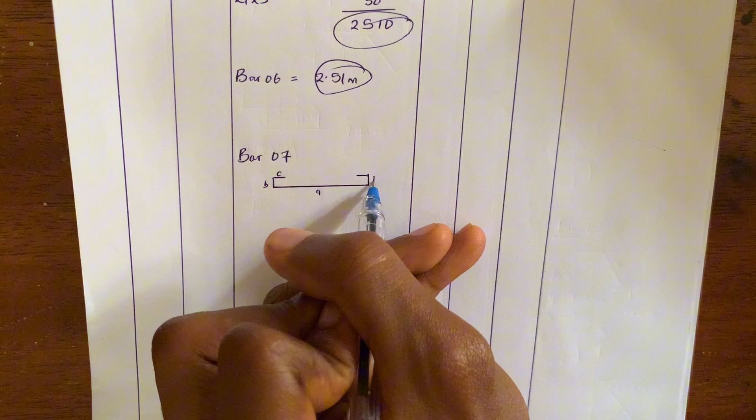And then I've told you how to find the return bar. So let's calculate for this length. Let me just say this bar consists of A, B, and C, where B is 2, and C is 2. So we have 1 A, 2 B's, and 2 C's. So let's calculate for A.

So if you look at this drawing, you can notice that the length of bar 7, which is this straight length here, is similar to the length of bar 6, which is this. So instead of recalculating this straight bar, we can just use the same measurement as this straight bar that we've calculated in bar 6. And we said that we calculated that as what?

2,510, which is 2.51 meters. So we can now say A is equal to what? 2.51 meters. So finding B,

So in order to find B, all you need to do is this: go and check the thickness of your slab, or of the landing rather. So now you can see that in this section, this is the thickness of our landing here, and they're giving it to us as what? 200 mm. So the thickness of landing is equal to 200 mm.

So it will now be less the concrete cover, which is 2 by 25, and that will give me 50. So when you do that, you'll be having 150, meaning that the length of B is 150 mm.

So after finding that, you will now find for what? C. And I said the formula for finding C is 50D, where D is equal to the thickness of reinforcement.

Which in this case, if you check our drawing, our reinforcement drawing, this is bar 7. It is Y12 in the call out. So we will now say 50 times 12 will now be equal to 600.

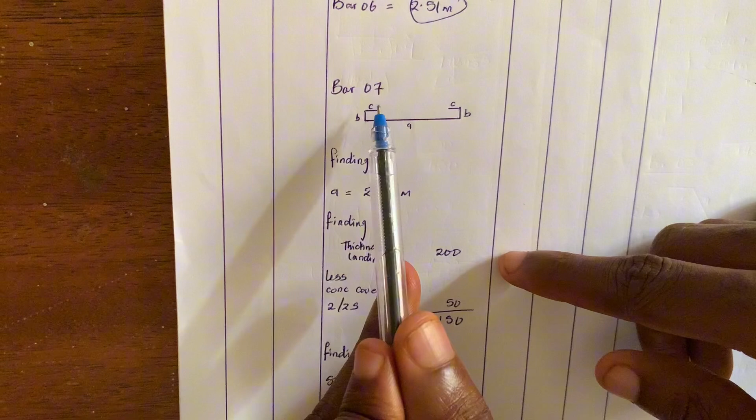So since we've gotten A, B, and C, what can we do? We know that B in our drawing would be in 2 sides, here and here. So we found one side as 150, so we're multiplying it by 2. We found also one side of C as 600, so we'll be multiplying it by 2.

So now this is what we're going to be having. A is equal to 2.51 meters. B will now be equal to 150 times 2, will give me 300, that's 0.30 in meters. Then C will now be equal to 2 times 600, and that will give me 1,200, in meters 1.20. So to find the total now, you add everything together: 2.51 plus 0.30 plus 1.20, and that will give me 4.01.

So 4.01 is the total length of this particular bar you are seeing like this. So you go to your bar bending schedule and you book 4.01. Then what is the number of this particular bar?

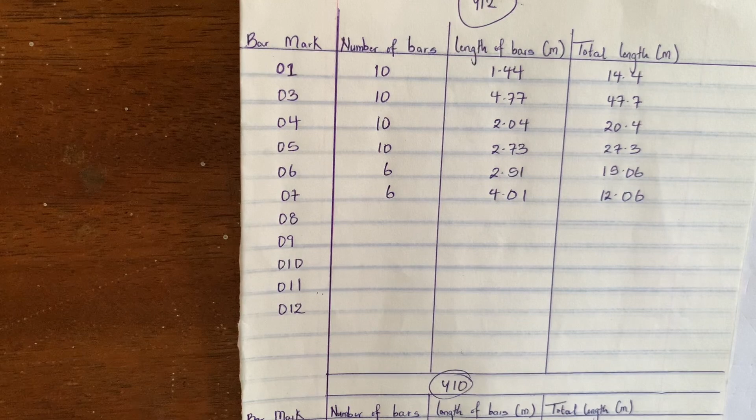So doing this, we've measured for Bar 7. The next one we're going to be measuring for is Bar 8. Now, if you look at the remaining call out, that's for bar 8, 9, 10, 11, and 12.

If you notice, the first flight is a mirror of the second flight in this drawing. There are sometimes one flight will be longer than another, then you have to calculate these other flights differently. But if you look at this now, the same number of steps that we have here is the same number of steps we have here. The same dimension of the landing is the same throughout. It doesn't have a complex design.

So now what we can now do is this: since we've already measured for the reinforcement in the first flight, that means this call out that you're seeing here is a mirror image of the first flight. Now look at this, this is Bar 8. Trace bar 8 to the reinforcement.

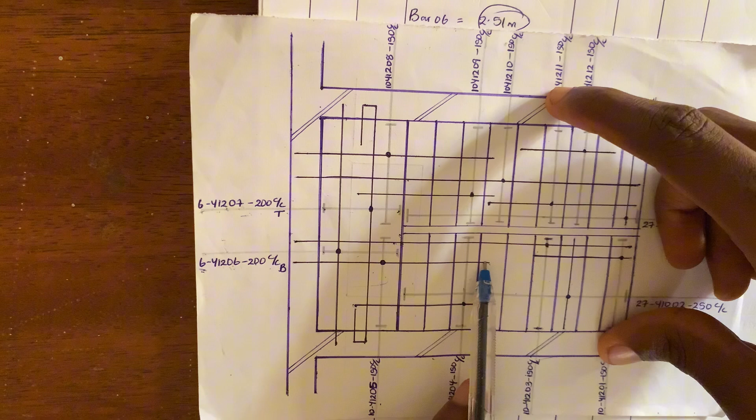Now look at this, you see this reinforcement we have here? It's the same as the reinforcement we have here, are you seeing it? Using the eye, just the normal eye, you can see that the way they drew this particular reinforcement is the same way they drew this bar 8. So it is a mirror image of Bar 5, and we've already measured for Bar 5. So instead of recalculating bar 8, we'll just take the measurement of bar 5.

Similar to Bar 9. Look at bar 9, trace it to the bar. You see this reinforcement bar? It is the same as this reinforcement bar here. So bar 9 is the mirror image of Bar 4.

Similarly, bar 10, trace it to the - you see this long bar here is the same as this long bar we have here. That means bar 10 is the mirror image of Bar 3.

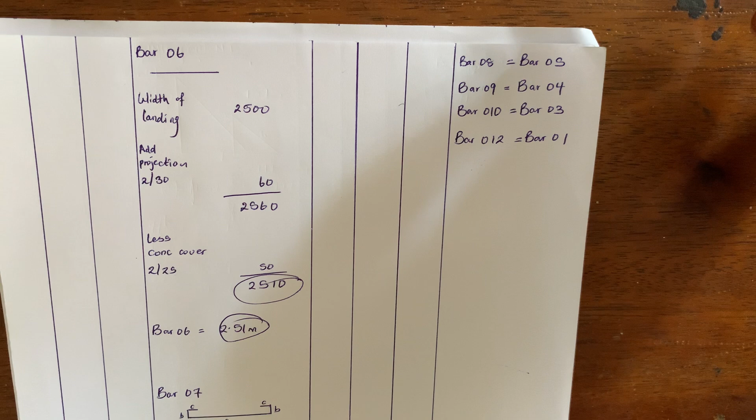Bar 11 doesn't have a mirror image. So what we can now do is that the ones that we've already seen are mirror images, we can just go and pick the values of what their mirrors were. So from the drawing, this is what you can deduce: Bar 8 is a mirror image of bar 5. Bar 9 is a mirror image of bar 4. Bar 10 is a mirror image of bar 3. And bar 12 is the mirror image of Bar 1. So instead of calculating bar 8, 9, 10, and 12, we are just going to be using what we've calculated before.

So we go to our bar bending schedule. We said that bar 8 is a mirror image of Bar 5. And what do we measure as our bar 5? 2.73. So we'll measure 2.73.

Bar 9 is the mirror image of Bar 4. So what do we measure as our bar 4?

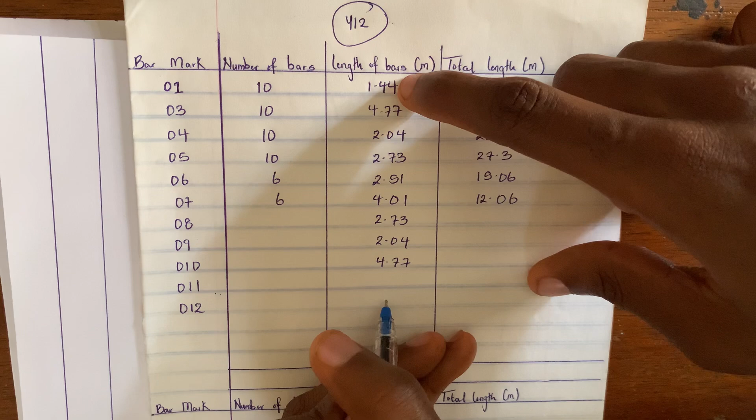Bar 10 is a mirror image of bar 3, which is 4.77. And then bar 12 is a mirror image of bar 1, which is 1.44.

So we'll now go and get the number of bar 8, 9, 10, and 12. In our drawing, we have 10 number for bar 8. Bar 9 is 10 in number. Bar 10 is 10 in number. Bar 12 is 10 in number.

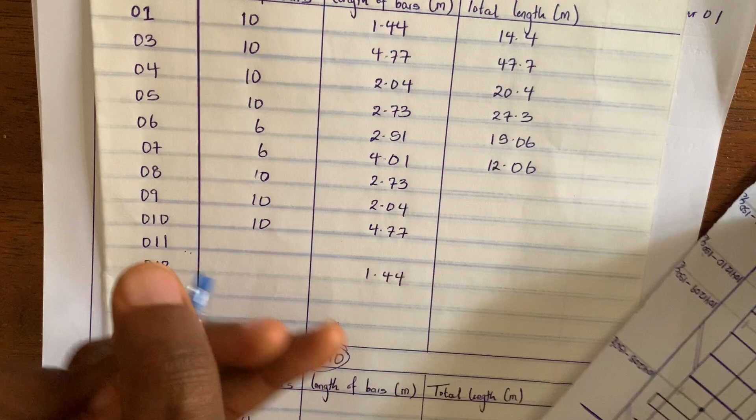So if you do the arithmetic to find the total length, this will be 27.3. This will be 20.4. This will be 47.7, and this will be 14.4. So the last thing we have to measure for is bar 11.

Bar 11: to find it, this is the call out, bar 11. So we'll now trace it to the dot. Now you can see that we don't have this particular bar in the first flight, so we're going to be measuring for it separately. So this particular bar is within how many steps?

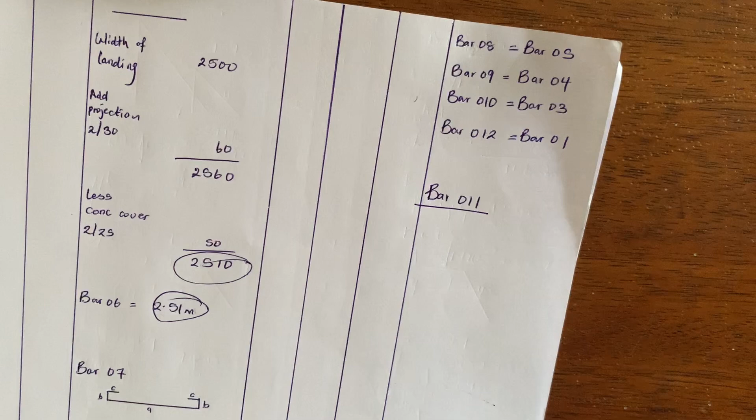1, 2, 3, 4, 5, 6, within 6 steps. So this bar is a slanting bar, because it's within the slanting side of the staircase. So we're going to be using Pythagoras theorem to find this particular bar.

So I draw out the triangle. Let's say the bar is Y. We need to find A and B. This bar is within how many steps? 6 steps. 1, 2, 3, 4, 5, 6. Within 6 steps.

So to find B, we are going to be multiplying our tread by 6. So it will be 6 by 333. That will give us 1998. We then less concrete cover from both sides.

2 by 25, and that will give me 50. And when we minus 50 from it, that will give us 1948. So doing this, we've gotten our B.

We now do the same thing similarly for A. To find A, since the bar is within 6 steps, we are going to be saying 6 multiplied by our riser, which is 175, and that will give us 1050.

So we'll now be lessing concrete cover from both sides. 2 by 25, and that'll give me 50. So when we minus it, we have 1000.

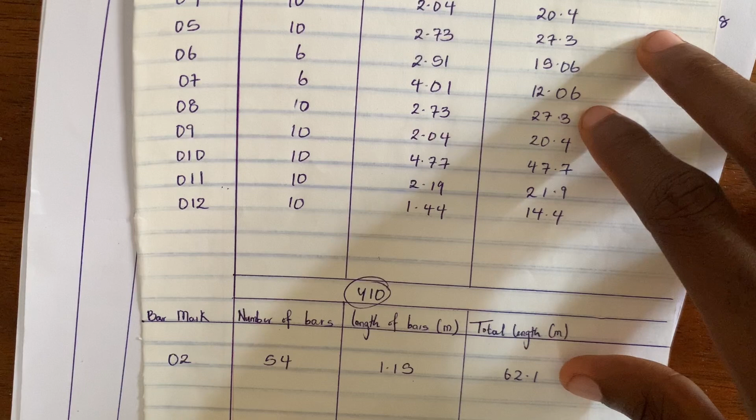So now all you're going to be doing is to get the summation of this total length for Y12, and get the summation of the total length for Y10. So let's add all this together to get the total length for Y12.

So we've calculated that the total length of our Y12 is 268.62 meters, while that of our Y10, since we have only one, we are going to be having 62.1 meters. So doing that, you've calculated the total length of your reinforcement in this particular staircase.